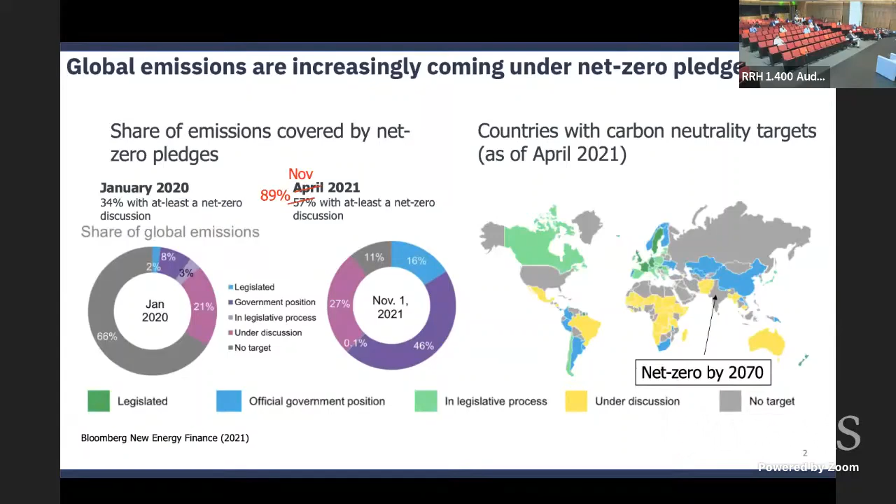In parallel, there's been significant global momentum to address methane emissions as a near-term climate solution. In fact, this is one of the areas that's most interesting because it's where the policymaker, the industry, and the scientists are all working together to address some of the biggest challenges that we have seen in this space. At COP26, led by the United States and the European Union, over 100 countries pledged to cut methane emissions by 30% by 2030. The Environmental Protection Agency, as we speak, is finalizing regulations to address methane emissions from the oil and gas sector. In fact, if you looked at the comments that have been submitted to the EPA, many of the giants in the energy industry are in support of these methane regulations.

At the same time, there's been significant investments in new technology and innovation by the Department of Energy. These investments started around 2014, 2015, 2016. Right now, many of those technologies that received funding from the Department of Energy are some of the fastest growing startups in the space. And many of you in the audience might even know of some of these companies and might work with them regularly to measure methane emissions. What these technologies and this innovation is doing is that it's democratizing methane emissions information.

Now, until very recently, the only way you knew about methane emissions is to do the same calculations as what the EPA did, or look at what the operators are reporting to the EPA on what their methane emissions are. But now we don't need to do that. There are technologies like satellites where all you have to do is point that satellite at a facility and you're going to find out what its methane emissions are.

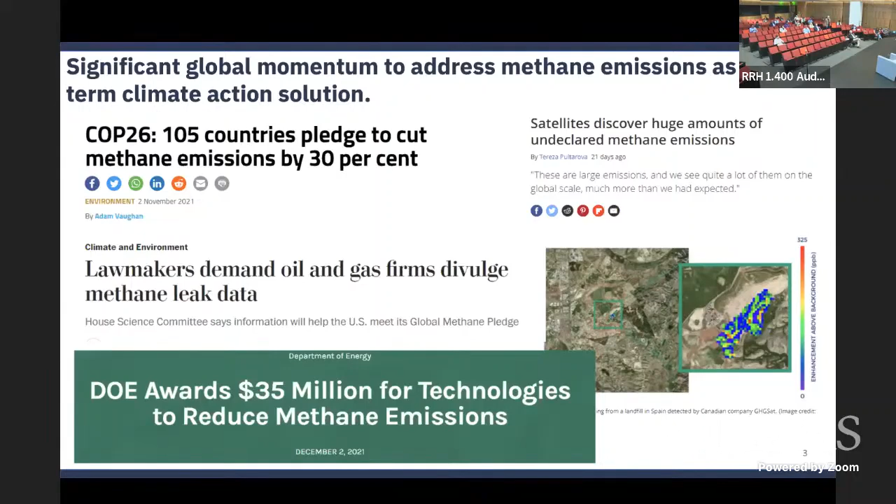Each facility is a very, very small part of the problem, but collectively, methane is a huge issue. If you just look at global energy sector methane emissions, that's just methane from coal, oil, gas, and a little bit of bioenergy, what you'll find is that it would be the third largest emitter, only after the United States and China. In 2021, global methane emissions were about 3,400 million metric tons of carbon dioxide, which is greater than India's total greenhouse gas emissions. So collectively, it's a big problem.

So how do we take that big problem, break it out into smaller chunks, and address emissions from the oil and gas supply chain? All right. So what are the key features of oil and gas methane emissions that are critical to developing what I call low leakage supply chains? The first one is that methane emissions vary widely across operators, basins, and countries. Emissions in the Permian Basin are very different from emissions in the Marcellus Basin. Similarly, emissions in the US are very different from emissions from other countries like Russia.

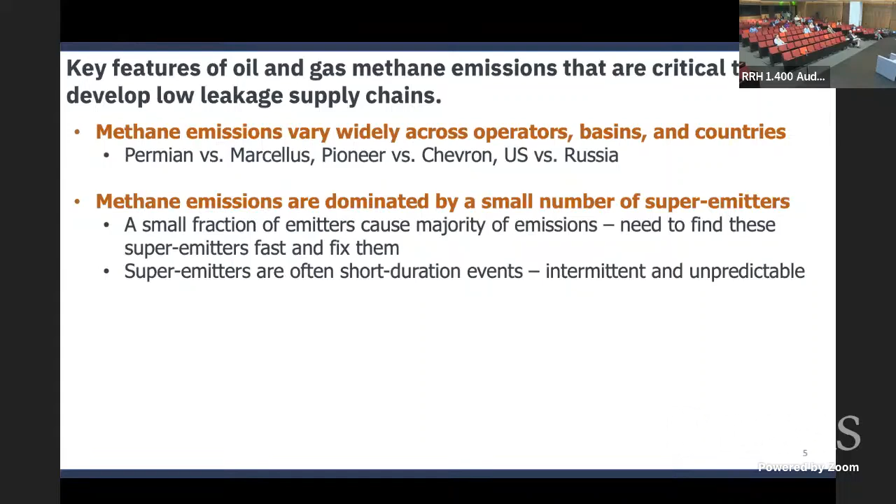Methane emissions are dominated by a small number of super-emitters. So what this really means is that a very small number of emitters cause the majority of your emissions. So the challenge of addressing methane mitigation is to find these super-emitters fast and fix them. And what makes it challenging is that they're often short duration events, which means they are intermittent and unpredictable. What we have also learned recently from research is that conventional inventory methods underestimate emissions. They do not account for super-emitters or their time-varying nature.

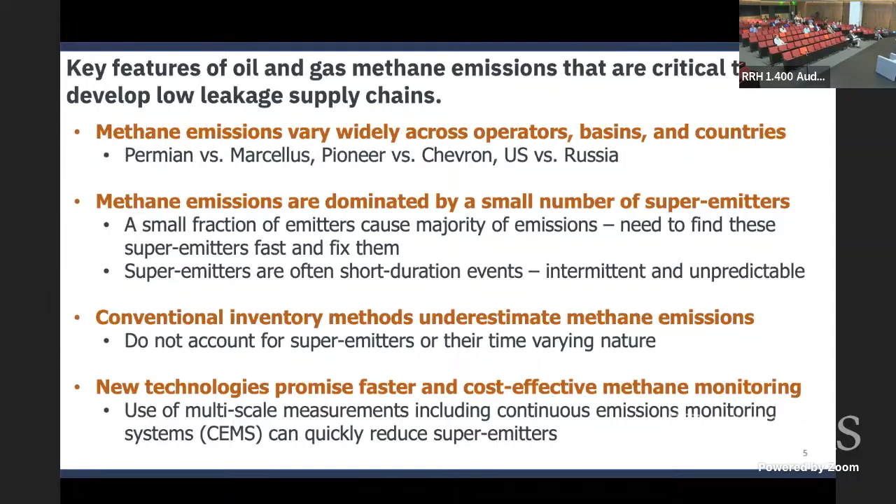And the last thing, and this is where a lot of promise is being seen, is that there are new technologies and innovations that are promising cost-effective methane monitoring. One example is using multi-scale measurements, including things like satellites, aerial systems, drones, continuous monitoring systems, that can quickly reduce these super-emitters. So here's an example of what I just told you.

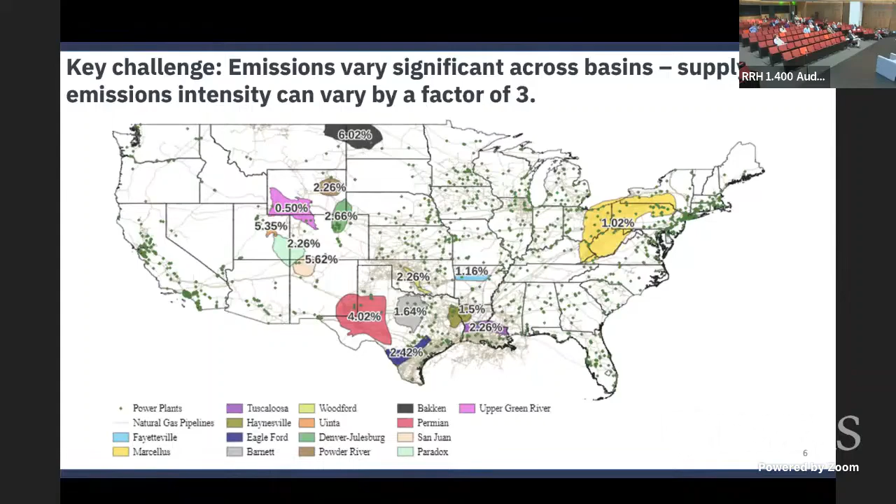Now, emissions vary significantly across basins. What you're seeing on this map is average methane emissions from recent publications and measurements across different basins. What you're seeing is a variety. So you have methane emissions as low as 0.5% in Wyoming and 1% in the Marcellus Shale in Pennsylvania, to as high as 6% in the Bakken Shale in North Dakota and 4% in the Permian Basin in Texas. What this translates to is that supply chain emissions intensity can vary by a factor of 3. So whether you get your natural gas from the Marcellus Shale Basin or from the Permian Basin makes a huge difference on what your supply chain emissions intensity is going to be.

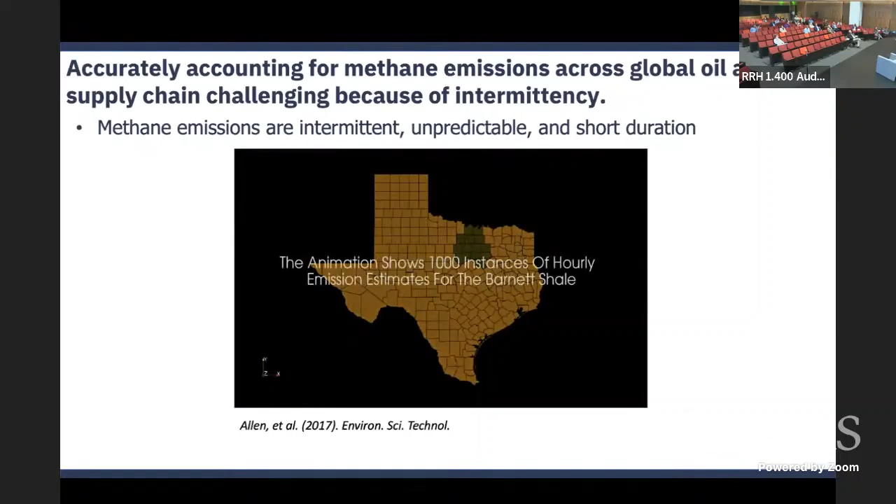And accurately accounting for methane emissions is challenging because of intermittency. What you're seeing in this animation is methane emissions in the Barnett Shale Basin, which is around the Dallas-Fort Worth area. What you're seeing are spikes. So these are the short duration methane emission events that we just talked about. These are intermittent, they're unpredictable, and they're short duration. So the question is, when methane emissions are varying like this, how do you get an accurate estimate of methane emissions at the annual level?

Because if you look at policies that require carbon accounting, it's not about what your emissions are at 5 p.m. on a Tuesday. It's what your emissions are on average for 2021, or what your emissions intensity is for a given supply chain. So you have to take the data that you're seeing, the animations that you're seeing right now, which are short duration emission events that you might measure maybe 1, 2, 3, 4 times a year, and convert that into information that's actually used in a policy or a business context. So that remains a big challenge.

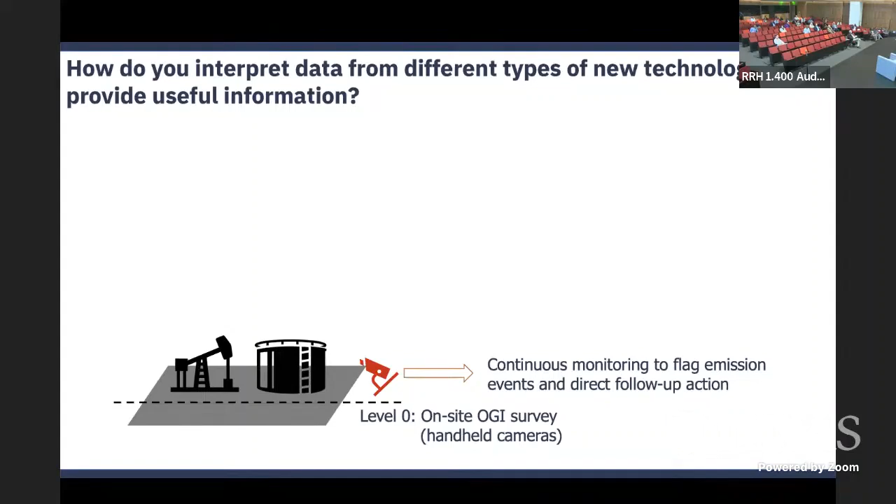And the next challenge is, with this proliferation of all these new technologies, how do you interpret data from different types of systems to provide you with useful information? As an example, you have technologies that operate on the ground, on your facilities. These can be handheld cameras, installed fence line monitors or other types of continuous sensors. They help you flag emission events and direct potential follow-up action.

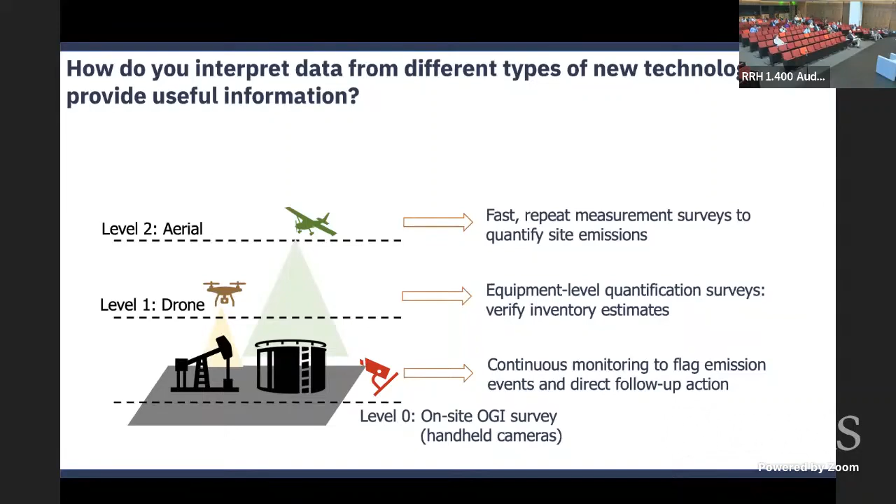At the next level, you have drones. Drones are very good because they fly about 10 to 30 feet off the ground, and they can tell you what emissions are at individual equipment, and you can use that to compare with what your emissions inventory says. The next level is aerial systems. They can fly anywhere between 1,000 and 3,000 feet. You put a sensor inside a plane and fly around, and their advantage is that they're fast. So they can cover multiple sites in a single day, even hundreds of sites depending on site density.

And so they are helpful in getting fast repeat measurement surveys to quantify site emissions. And then, of course, you have satellites. Many of them are low Earth orbit satellites around 100 to 150 miles from the surface of the Earth, and they are helpful in regional monitoring and long-term monitoring of asset portfolio.

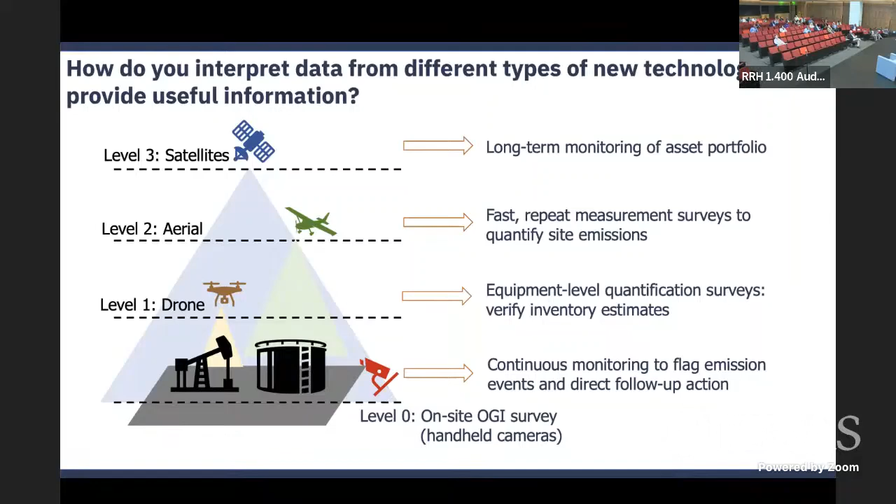What you see here is that different kinds of technologies give you different kinds of data. And so the question is, when it comes to policies, what is your annual emissions or what is your supply chain emissions intensity? The question becomes, how do you put data from all of these very different systems together? And why is it important? I'm going to give you some examples of why it's important now to think about effective carbon accounting.

So two key provisions in the Inflation Reduction Act. One is the implementation of the methane fee, and the second one is updating US greenhouse gas inventories using empirical data. So methane fees, as some of you might know, is something that's assessed on operators' methane emissions that are emitting beyond a certain threshold. So the question is then, how do you develop accurate annualized emissions intensity estimates from measurements? And this cannot be done at the national level or the state level. This has to be done at the operator level and the asset level.

It's one thing if we want to know what is the average methane emissions across the US. We know it's about 2 to 2.5%. But it's much harder to talk about what is the emissions intensity of an individual facility, of an individual operator in the given basin. So how do you do that? And you need something like that for the methane fees to be successfully implemented.

And this is related to the second provision in the Inflation Reduction Act, which is updating US greenhouse gas inventories with empirical data. We know that the official reporting program, such as the Greenhouse Gas Reporting Program by the EPA, does not include all sources of methane emissions. So what Congress did is direct the EPA to use measurements to improve greenhouse gas emissions inventories. It's easier to say that in the rule. It's 2 sentences in a 1,000-page rule, but it's a really challenging problem.

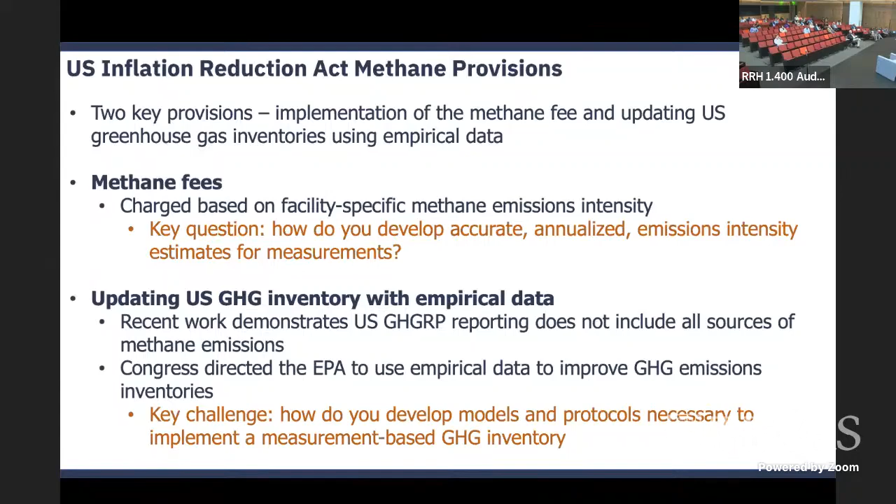How do you develop the models and the protocols needed to implement a measurement-based greenhouse gas inventory? This has never been done before. And this is something we're going to need for the future, where provisions like the methane fee will require updated greenhouse gas emissions inventories. So this is an example of why accounting is going to become really important.

So one of the provisions in the Inflation Reduction Act is a tax credit for production of hydrogen. And what the law says is that if your life cycle emissions associated with hydrogen production is less than 4 kilogram CO2e per kilogram of hydrogen, you are eligible for subsidies. So what we did was we looked at, if you want to produce blue hydrogen, which for those who might not know, is hydrogen that's produced from natural gas using steam methane reforming and then using carbon capture to prevent the CO2 from entering the atmosphere.

So what we wanted to look at is, where will blue hydrogen production be eligible for these tax credits through the Inflation Reduction Act? And so what you're seeing on this figure are modeling of blue hydrogen production from gas sourced in the Marcellus shale basin on the left and gas sourced in the Permian basin on the right. So there are two major variables that we have control over. One is supply chain methane leakage, which is on the y-axis, and the other is carbon capture rate. Now, you can have capture rates of anywhere between 80 to 95%.

But because we know that methane emissions vary quite a bit between these different basins, what we see here is striking. If you take what the current levels of methane leakage are in the Marcellus basin, as well as achievable carbon capture rate, what you find is that blue hydrogen production in the Marcellus shale basin today will be eligible for tax credits because the life cycle emissions will be less than 4 kilograms CO2e per kilogram hydrogen.

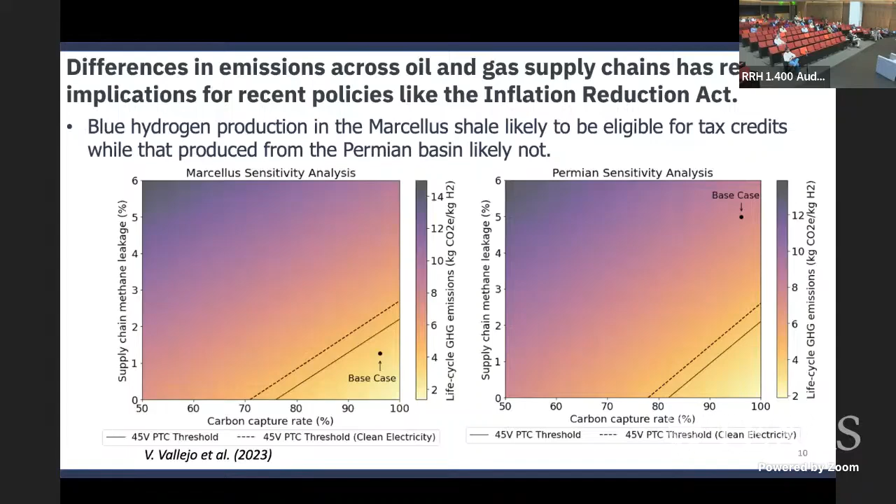So it becomes a very project-specific estimation of greenhouse gases. Another example, and this is now coming on the voluntary side. There are markets for differentiated natural gas and other voluntary approaches that are dependent on availability of accurate emissions information. The Department of Energy hosted a roundtable at CERAWeek earlier this month to talk about what differentiated natural gas means. And there are different approaches here.

There are certifications that provide assurances of low methane emissions. We have MIQ and Project Canary that do that. There are monitoring, reporting, and verification programs, or MRV programs. This is prominent in methane, but this is also something that's going to come in carbon capture and other sorts of carbon emissions. There are several organizations that develop these protocols.

In the US, we have GTI Veritas. Internationally, we have the Oil and Gas Methane Partnership. We also have the Greenhouse Gas Protocol that many companies use to report their greenhouse gas emissions. And then more recently, we have things like digital certificates and registries to enable trade in low leakage natural gas.

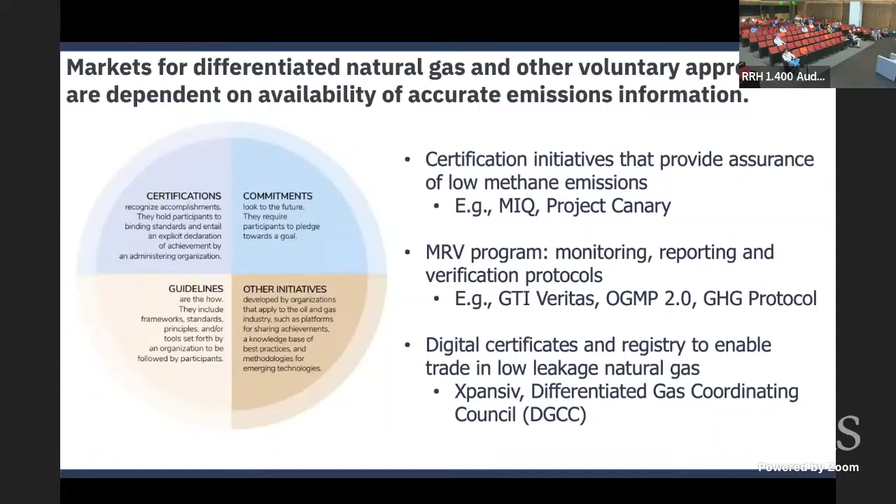Irrespective of what form these voluntary markets take, all of them are going to require accurate supply chain greenhouse gas emissions information. And it must be trusted by a lot of different stakeholders. It must be trusted by the industry, by buyers, by regulatory agencies, and the broader public to have credibility in any of these voluntary approaches. And building trust requires transparency, and that's a real challenge.

And so what is the fundamental challenge in interpreting methane emissions information? So the question for us is, how are greenhouse gas emissions measurements made through various methods, various technologies, used to create actionable information that is reliable, transparent, trusted, and timely?

If folks in the audience have rented a car, one of the things that's currently available is you could pay $1.50 to offset all of your emissions associated with the rental car. And I haven't yet met a single person who actually believes that $1.50 is going to offset all of your greenhouse gas emissions from that rental. And so what's needed is not just a mechanism to know what the supply chain emissions are. We have to make sure that mechanism is trusted.

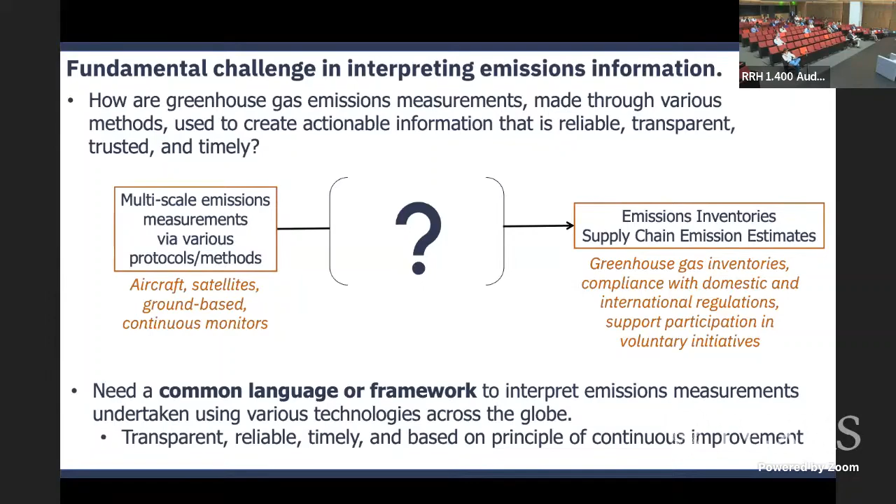And thankfully, the National Academies in the US came out with a report late last year talking about this exact problem and specifying the features you need for this framework that helps us interpret data to provide useful information. Some of those principles are that the framework needs to be transparent, reliable, comprehensive, scientifically robust, and user-friendly. There's no point in having models and frameworks that you need 25 PhDs to run. You need something that anyone can use across the supply chain, small operator or big operator.

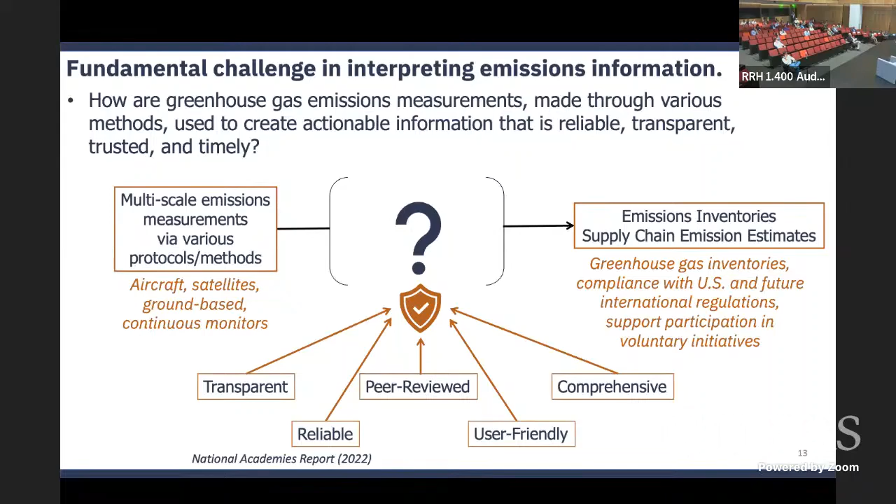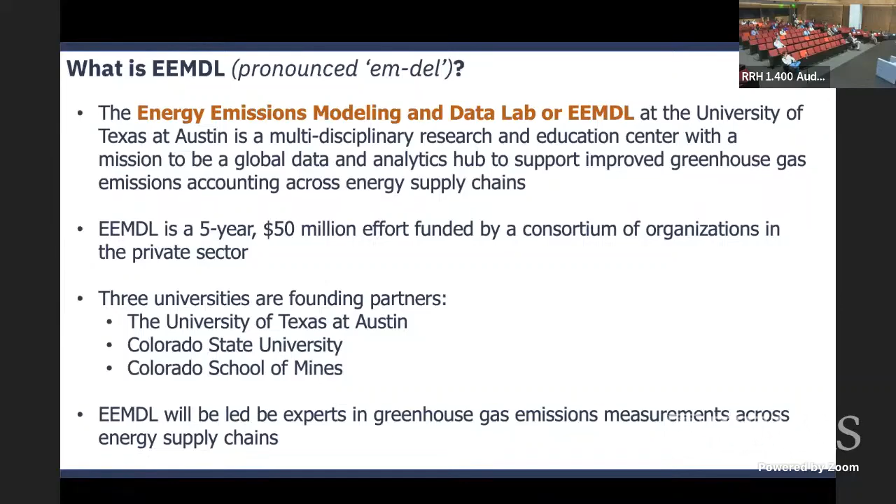And so this is where the initiative that Dave Allen and I are heading, the Energy Emissions Modeling and Data Lab, comes into the picture. We want to develop some of those models and frameworks to help with accurate carbon accounting. Our goal is to be a data analytics hub to support improved greenhouse gas emissions accounting across energy supply chains. It's 3 universities, University of Texas at Austin, Colorado State, and Colorado School of Mines. And we want to do 3 things. The first one, as I just talked about, models, tools, and methods.

We want to create the methods and the framework that help us go from all of the data that we're collecting to useful information that can be part of policies. So we want to develop the tools to improve regional, national, and global emissions inventories using measurement-informed approaches. And these are tools that will be available to the community. We'll develop these tools, we'll make them public. Now anyone can take these tools and use them.

And I'll give you some examples of how some of the tools we have built are currently used by the EPA and other agencies. The point is to make sure that the common framework and the language I talked about is available to everyone so that there's some trust built into the numbers that we need. Things like carbon emissions intensity and supply chain emissions information.

In addition, we'll make data sets public. So we'll provide high resolution and reliable measurement-based data sets on methane emissions across supply chains. There's been a lot of measurements just over the past 5 years. Many of them are public, many of them are funded by the Department of Energy, but there's also a lot of measurements done by oil and gas companies internally. None of the data are public for good reasons.

And so one of the things we are going to do is, because we are going to get data from several operators, we are able to effectively aggregate them, anonymize them, and make them public. The advantage is that you get to see how emissions across different basins, across different supply chains are actually reducing, which helps us not just within the US to track our progress in reducing methane emissions, but it also helps us internationally, which is becoming increasingly important as the US is the largest exporter of natural gas.

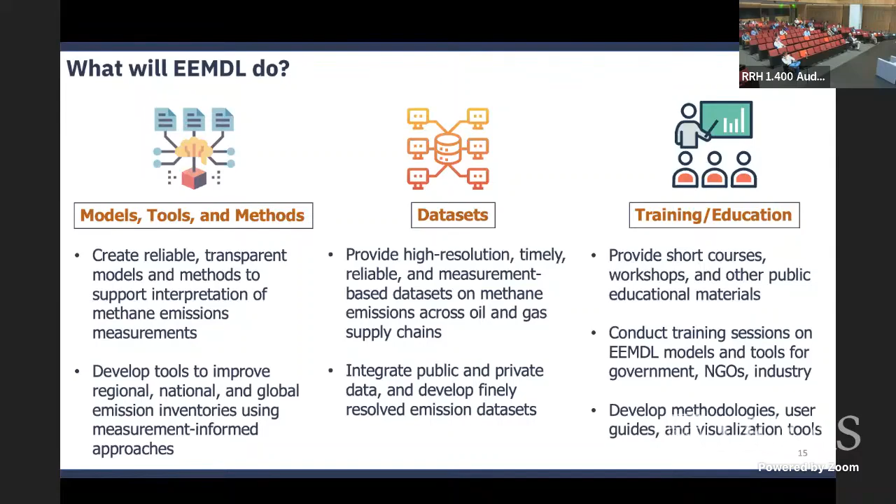So how does this actually work in terms of what kind of data we're going to be using? So we take data from oil and gas operators. These are based on measurements. This is operational information. We integrate them with data from various research projects that the Department of Energy is funding. We integrate them with public data, such as the Greenhouse Gas Reporting Program, the Permian map that was developed by Environmental Defense Fund, and other publicly available information. We put them all through the models and the protocols that we develop. We aggregate and anonymize them, and then we make them public.

And what do we make public? Things like measurement-informed inventories across supply chains, across regions, across basins. We'll publish an up-to-date US methane census regularly. And this will get updated by the latest measurement data that's coming in. And then we'll publish basin and asset-wide intensities.

There have been 5 or 6 recent measurements in the Permian Basin, and what they measured ranged from as low as 3% to as high as 9%. What's the correct number? So we want to be able to aggregate data from several sources to make sure that we have the best estimate of emissions across different parts of the country. And the goal is to build trust across industry, regulatory agencies, and the public.

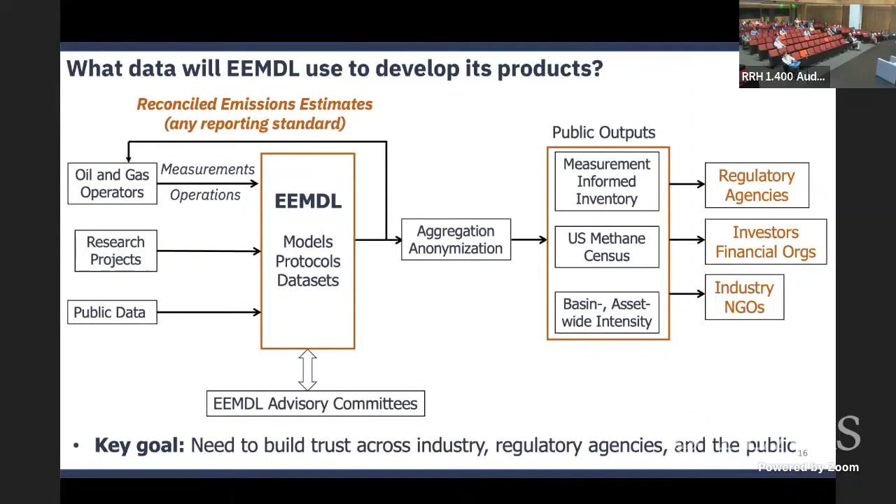So for the next 15 minutes or so, I'm going to show you examples of what this means and how we are thinking about this modeling exercise and how that's going to be useful in developing improved carbon accounting estimates. The first one is using measurement-informed emissions to estimate life cycle emissions of US LNG supply chains. So one of the things we are seeing right now is that there are significantly higher emissions in the Permian Basin compared to the Marcellus Basin. This is what's leading to differentiated LNG supply chains.

And so what you're seeing here is the life cycle greenhouse gas emissions intensity for 2 different shale basins providing LNG to the UK and China. So if you're looking at gas that's sourced from the Marcellus Shale Basin, your greenhouse gas intensity is anywhere between 15 and 20, depending on your shipping distance. But if you're looking at the greenhouse gas emissions intensity for gas sourced from the Permian Basin, your intensity is anywhere between 30 and 40 grams CO2e per megajoule depending on your shipping distance.

So even within the US, even though our overall methane emissions is about 2%, you can see that the life cycle emissions intensity of LNG supply chains is going to vary quite a bit, depending on where you're getting the gas from.

And now with the data that's available, we can do this at the basin level. But what you really want is doing this at individual supply chain levels. So if you know you're getting natural gas from 3 operators in the Marcellus Basin, we can actually do direct measurements across those 3 operators and calculate what the supply chain emissions intensity is for that specific supply chain.

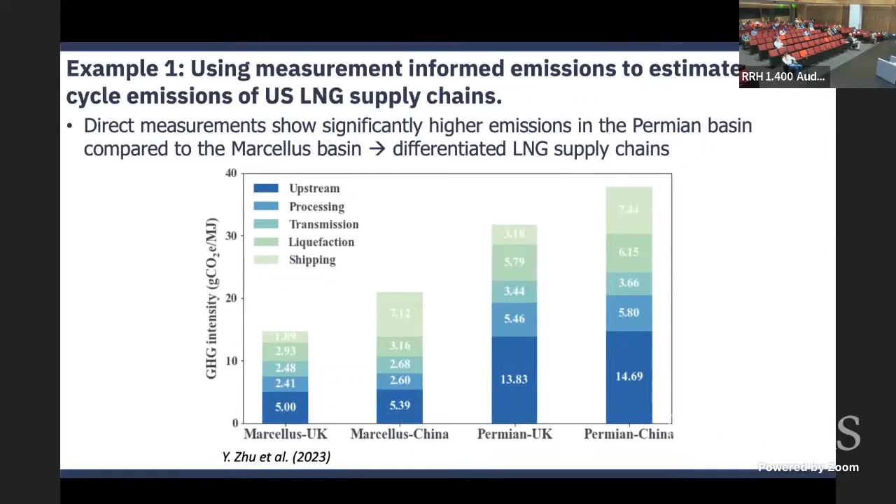Another example: I showed an animation earlier about how methane emissions are very intermittent and short duration. We want to understand what is the frequency of those events and what is the duration. And so here's an example that we recently did. What you're seeing is a picture of an oil and gas production site, a fairly simple site. You have a small number of equipment. We put 3 sensors on the site. And what these sensors are telling us is real-time information on methane emissions.

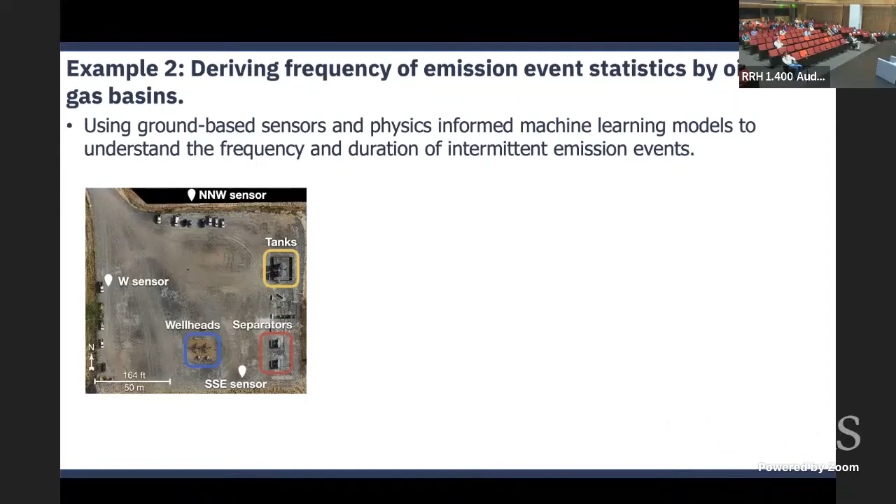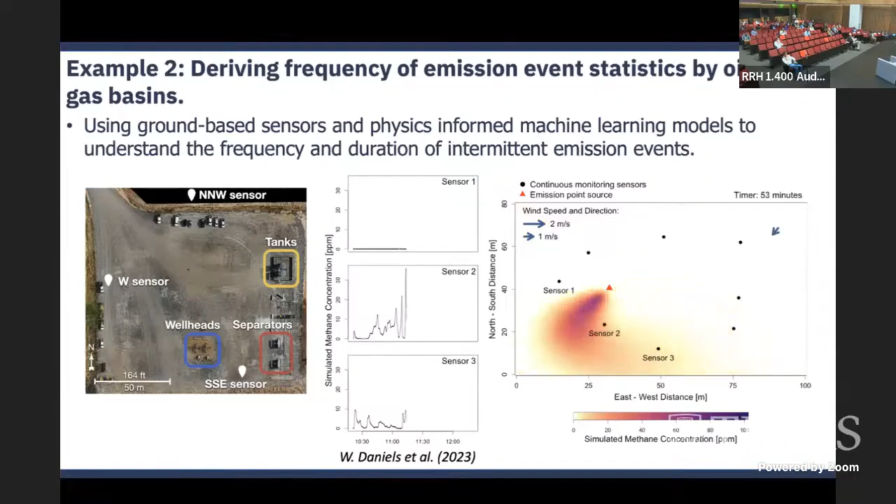Now, if this is all you have, it doesn't tell you anything about what the emissions are, what the intermittency is, what the frequency of those events are. So the challenge is, how do you take data that you see in the middle, just methane concentrations over time, and translate that into useful information? So that's what we did. We derived frequency of emission event statistics for different oil and gas basins. And this is part of what going from measurements to information is.

If all you have are data with 1 satellite overpass or 1 aerial measurement, you're just going to get a measurement on a given day. You're not going to know how often that kind of emissions occur. And what we are seeing is that sometimes emissions occur very rarely. So you have to scale your snapshot data with satellites or aerial measurements to accurately account for emissions over a range of time period.

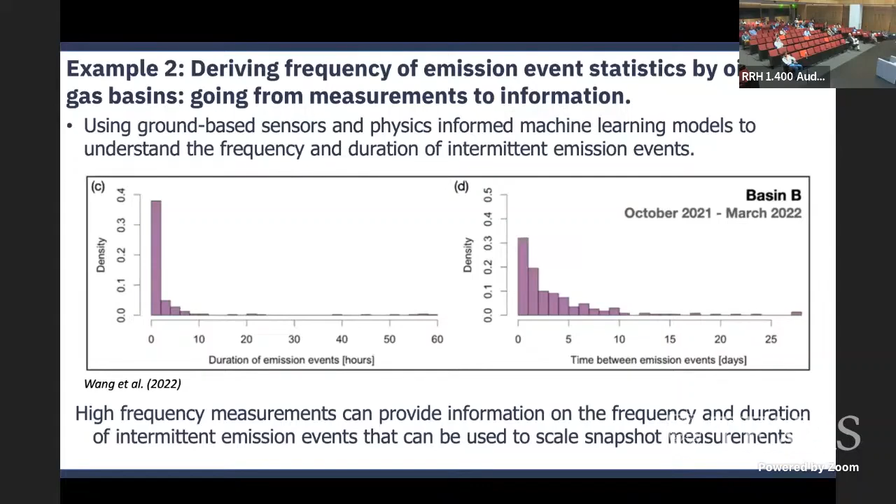So here's an example of emissions from one site. We flew over the site, we found a very large emission, 3,000 standard cubic feet per hour, which is completely out of the ordinary. If you didn't know anything about emission events, you would just add that into your inventory estimates. But what we found is that an event of that size, 3,000 standard cubic feet per hour, is very rare. They happen just 1% of the time. But lower volume events, let's say about 100 standard cubic feet per hour, happen more frequently, 40% of the time.

And so if you just do 1 or 2 or 3 measurements, depending on where you fall on this distribution, you might measure as low as 0, you might measure 100, or you might measure 3,000. So you need to know how often such events occur. And for that, you need models that must be standardized and universally adopted.

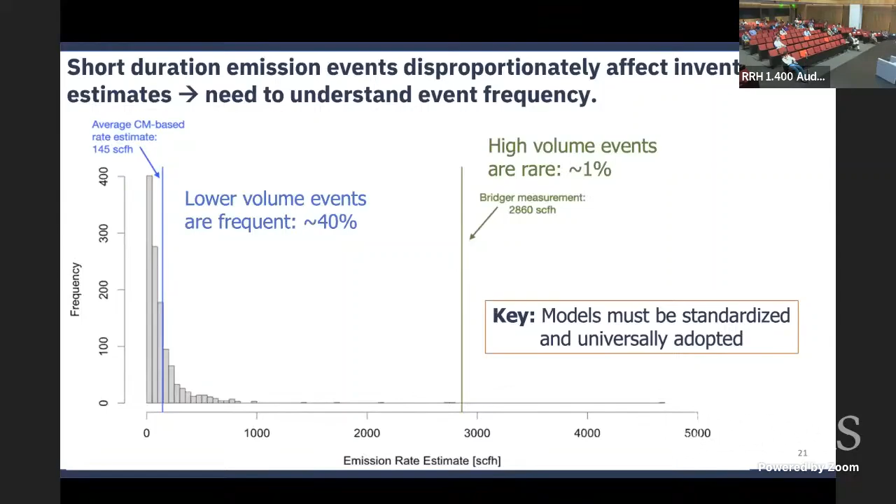So the last example that I'm going to give is using techno-economic models to inform methane regulations. The FEAST model is something that we developed in our group, the Fugitive Emissions Abatement Simulation Tool. And what this tool really does is compare the effectiveness of methane reductions using different technologies. So one operator might want to use an aerial system. Someone else might want to use a drone. A third operator might want to use a ground-based system.

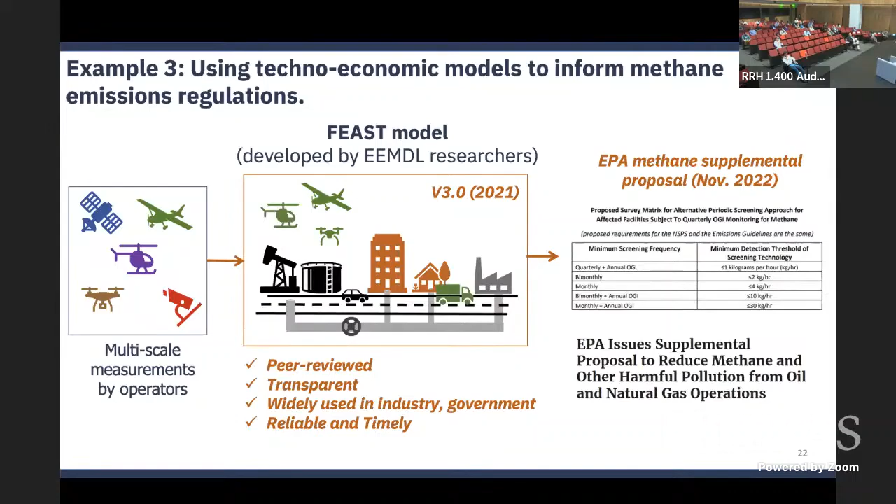The question for the regulator is, how much emissions reductions are you going to get, depending on which technology you're using? So because the FEAST model is public and it's peer-reviewed, EPA took the model and used it in their latest methane regulations. And so I'll show you exactly what the EPA did. What's happened in the past 5 years is that new technologies have been shown to cost-effectively monitor, estimate, and help reduce supply chain methane emissions.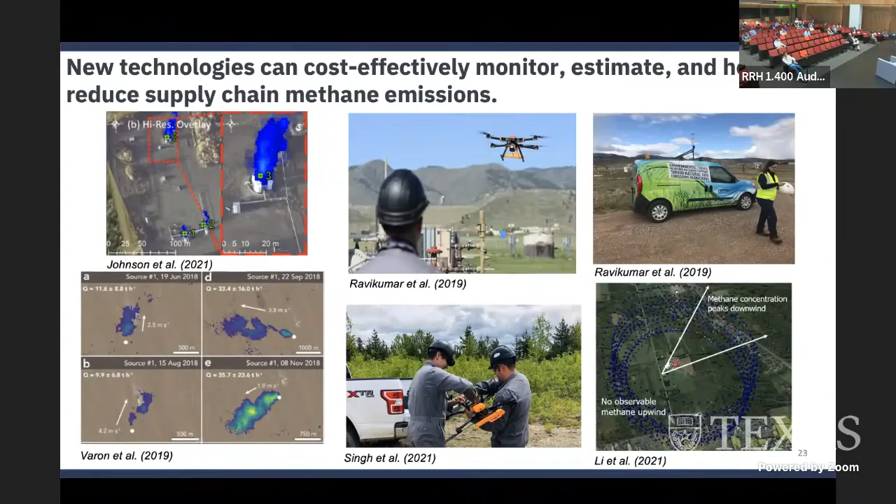And so they're also cost effective, which means operators want to use these new technologies as opposed to some other conventional approaches that we have been using in the past, which are just ground-based surveys with handheld cameras. And so we developed the FEAST model to inform what emissions reductions you're going to get by using some of these new technologies.

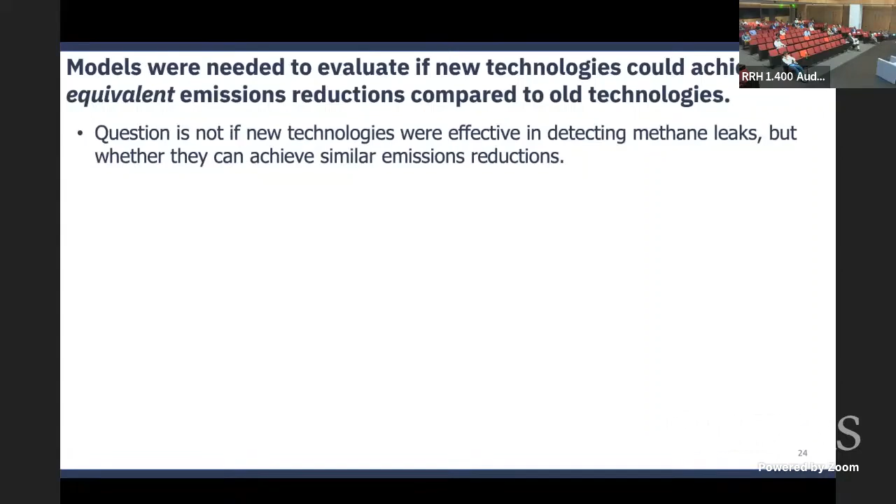And so why do you need these models? Because the question is very different in terms of what the EPA wants to know. It's not about whether new technologies can detect emissions. Of course, we can do a lot of testing to understand if a drone can see a methane leak, if a satellite can see a methane leak. And we do a lot of that testing at the METEC facility at Colorado State University. But the question for policymakers is slightly different.

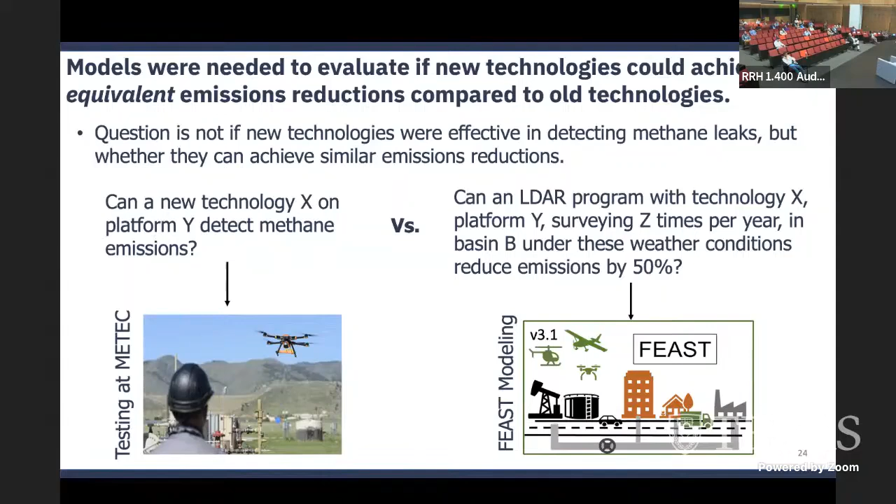It's about, can a leak detection and repair program with a given technology on a given platform, like a drone, surveying so many times per year in a given basin, under these weather conditions, reduce emissions by 50%? The question on the right is what policymakers are concerned about. And to be able to do that, you need to develop models to compare different technologies. And so that's what we did with the FEAST model.

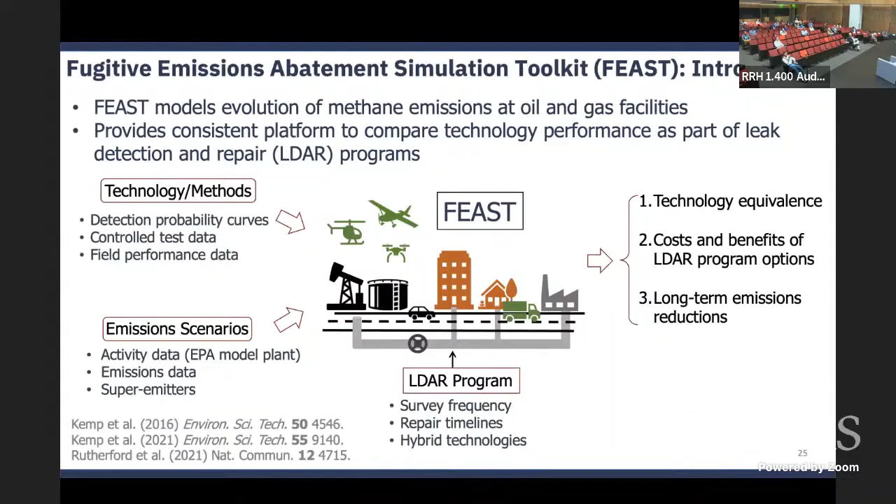It takes in data on technologies, it takes in data about emissions, it takes in data about the policy details, and what it tells you are the costs and benefits of using different technologies and different leak detection program options.

And the way they got to this table is they modeled all of the different technologies using FEAST, and then found out under what combinations of technologies and survey frequency you can achieve the same emissions reductions. Now, every operator has flexibility in choosing whatever technology they want for reducing methane emissions and still be in compliance with EPA regulations.

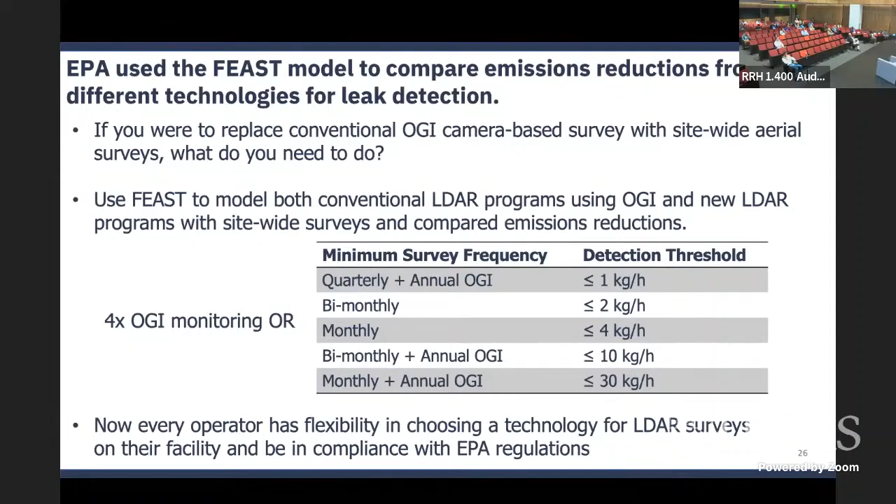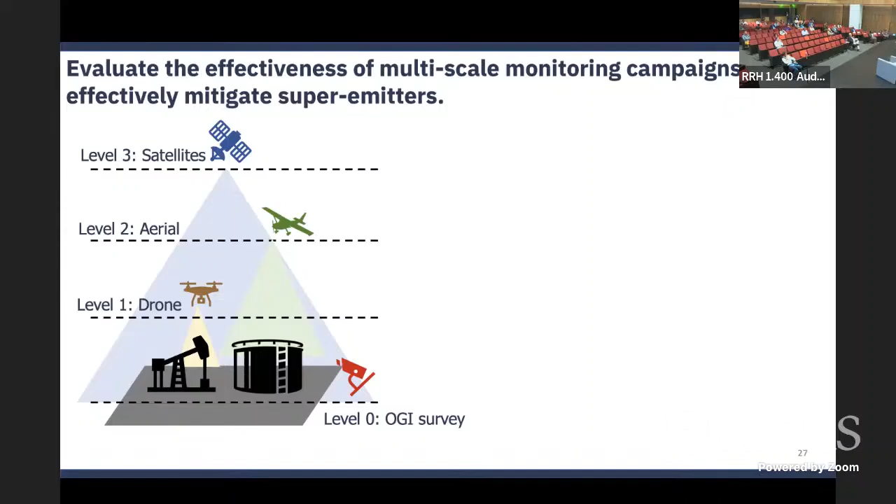And so you can talk about how different technologies, whether it's a satellite or an aerial system or a drone system, how much emissions will it reduce depending on how often you survey. And so this is another example of how models have been useful in moving from data to information. And in this case, the information is about the potential for emissions reductions under given methane policies.

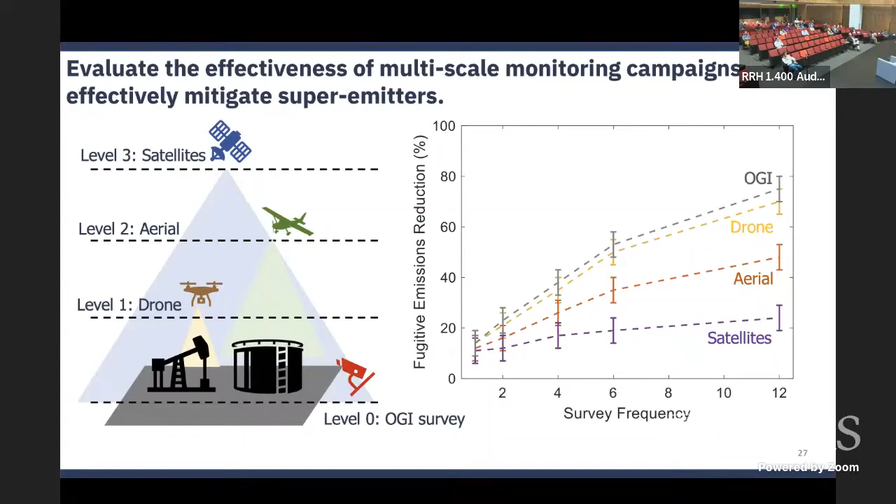So to summarize, models are needed to help interpret measurements to provide useful supply chain emissions information for both markets and policies. Now, recent policies like the Inflation Reduction Act and voluntary efforts such as differentiated gas markets are going to require accurate supply chain carbon accounting. But as we have shown you, going from measurements to emissions inventory is a challenging problem. You have uncertainty in technology, you have intermittency of emissions, you have sample size constraints. And so there's a lot of uncertainty, and reconciling these measurements with annualized inventory estimates is a complex issue.

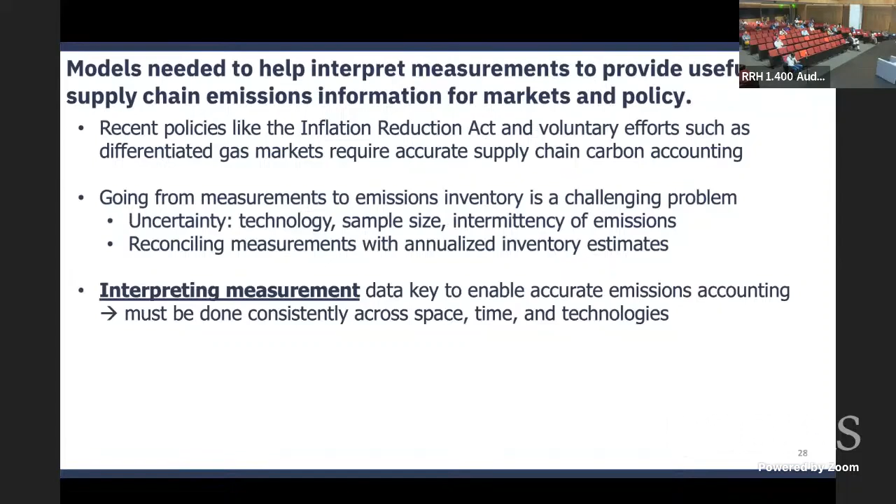Interpreting measurements is key to enabling accurate emissions accounting. And the key is this must be done consistently across space, time, and technologies. And we need transparent, scientifically robust, and publicly available community models to move towards a measurement-informed approach to policies.

I'm going to end with what I said when I started. This is not something that one person or one team could do. This is going to be a community effort. We're going to be developing some of these models. We're going to be analyzing all of the data that's coming in, but we want to work with all of you, the audience, to think about how we move this forward collectively, so the solutions that we need are available next year, not 5 years from now.